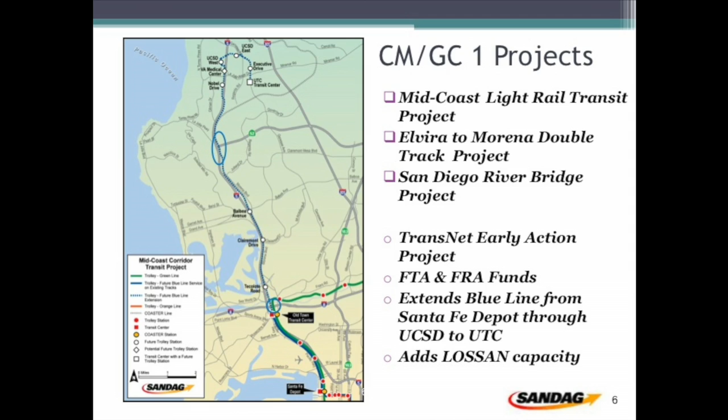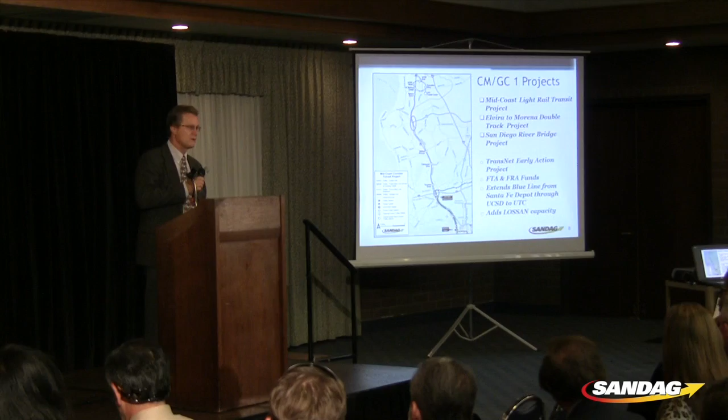The real improvement here is that it will be a one-seat ride on the Mid-Coast project from the border all the way up to the UTC area, including the University of California San Diego. You've also got a stop at Old Town, which connects that to UCSD, and a stop in the Linda Vista area, which connects us to USD. And the LOSSAN double tracking will be one element of significantly increasing the capacity for the COASTER rail up and down the coast from Oceanside down to downtown San Diego.

So the next slide just is some facts and figures about the Mid-Coast project. It's about 10.9 miles of actual rail construction from Old Town north. We're going to do a flyover so you'll see where that's going exactly. We've got about 4 miles of elevated guideway. So once we get up in the UTC area, it's all aerial structure. There's 4 at-grade stations and 5 aerial stations.

It's a major rail project for light rail, so that includes electrification, which is traction power, rail signaling, communications, telephones, PA speakers, visual message signs. Just kind of listing off some of the things that small businesses have opportunity to work on in both the design and the construction side.

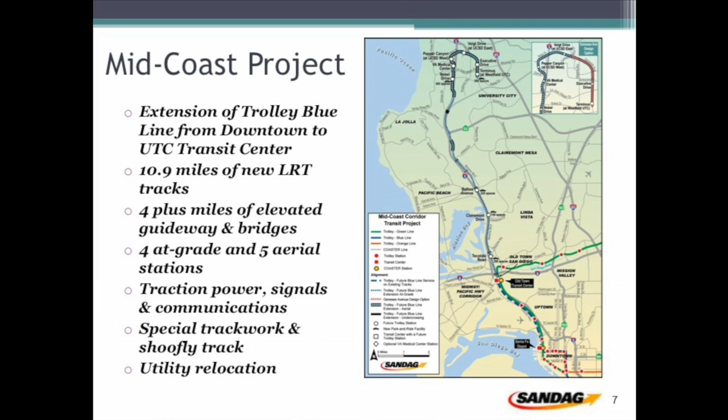Then we have a lot of track work, including a lot of temporary track work. And track work requires things like grading, rail supply, ballast supply, a lot of trucking that's involved in that. And then we've got utility relocation, and a significant amount of utility relocation in the project. So also some significant opportunities for small and disadvantaged businesses.

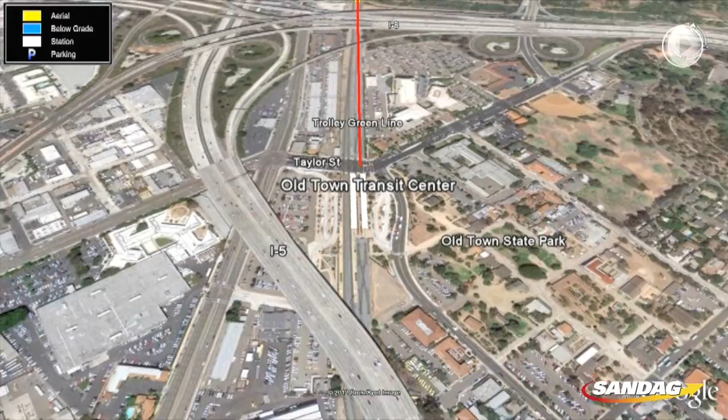So what we're going to do next is go through a flyover. We're starting at the Old Town Transit Center, and we're going to be going north, more or less parallel to I-5. So here we go, heading underneath I-8. Pause it for just a second. So this is where we've got bridges over the San Diego River. So the yellow is the new light rail bridge.

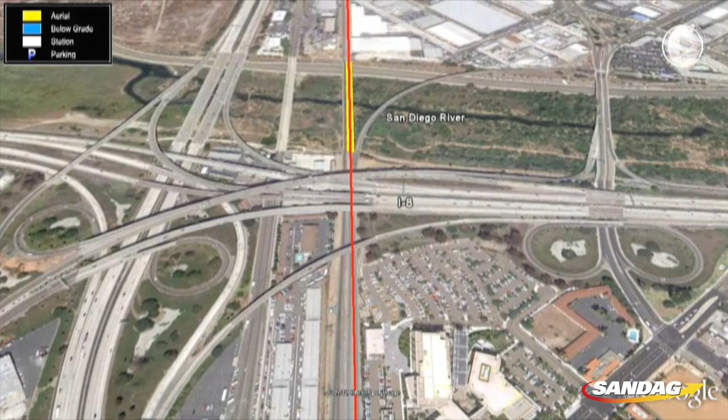Just to the west of that, we're going to first build a new bridge for the LOSSAN, tear down the old bridge and replace that so they get 2 new double track bridges, and then we're going to build a light rail bridge. So we've got essentially 3 bridges in this area that are going to be part of the program. Go ahead. So now we're building track at grade parallel to the LOSSAN track, and pause here.

We have a station at Tecolote. It obviously includes parking. Typical at-grade stations on this project are mostly going to have parking. So we've got parking, so that's paving, striping, lighting, all those things. So go ahead, moving on. A little bridge over Tecolote Creek.

Continuing to move north, again, we're paralleling I-5. And this is basic track work construction. And then pause it here. So we're at a station at Clairemont Drive, and that also will have parking on the east side of Morena Boulevard. And so we can keep going.

And so again, we're building track, and as we're starting to head north, we're getting into other areas where we do a lot more retaining walls. So there's going to be retaining walls and grading in this area going north.

We have a station at Balboa Avenue. The station at Balboa Avenue includes some work with traffic signals and street reconstruction at Balboa Avenue Station, 220 parking spaces, a bus transit center. So all of the things that go with that: lights, paving, grading, rail construction. Go ahead.

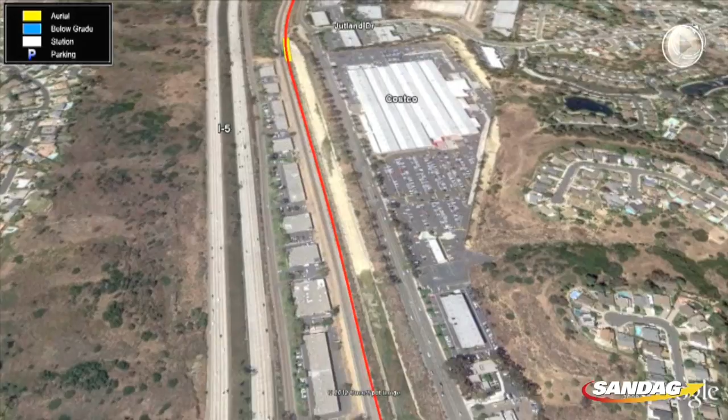And so we're continuing to move north. And just, again, we're in the existing railroad corridor. The yellow is where we're going to cross Rose Creek once, and we're going to cross Rose Creek again, going north. And so this is just construction, and go a little farther, and just pause it here.

Now this is one of the more interesting and I think more challenging parts of the project. In this corridor where we've been going so far on this little flyover, we're in an operating railroad. So in this area, the Coaster has trains that run in the commuter hours, BNSF runs in the midday and at night, and Amtrak runs in the same corridor. So a lot of the challenges here aren't so much engineering challenges, they're construction phasing and coordination challenges.

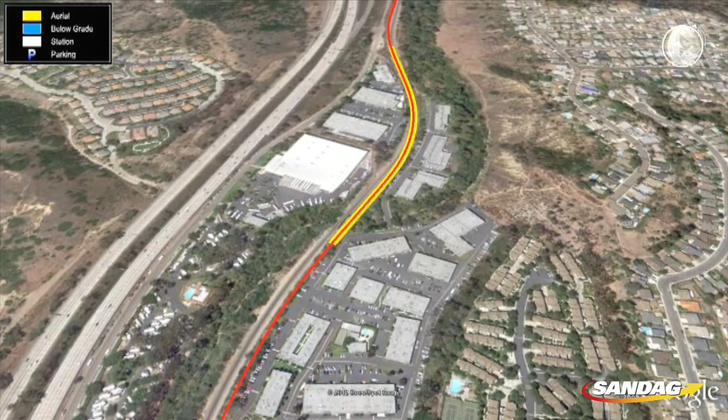And in this location, that yellow indicates where, up until this point, as you saw, we've been on the east side of the LOSSAN tracks, the way we cross. We've got to continue up I-5 and go north. At this point, a little farther to the north, the LOSSAN tracks go east. And so we're crossing over. So this is a major structure where we're crossing from the east side to the west side of the tracks and landing just back underneath SR 52. So go ahead.

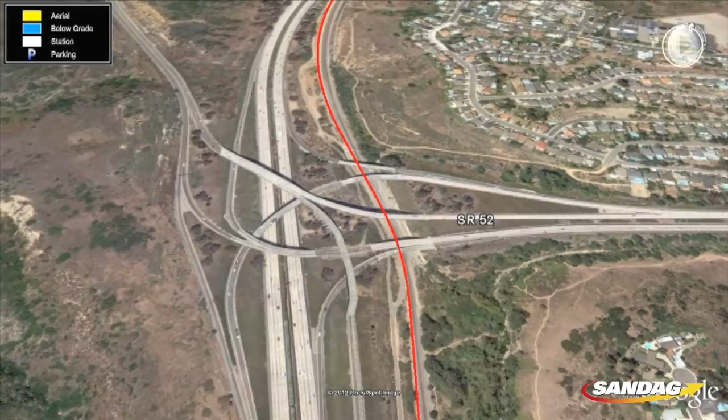And so in this area, we've got some work. Pause just real quickly. There's a significant drainage channel that's being reconstructed under SR 52. Keep going. And so now we're paralleling the LOSSAN track, but now we're on the west side. We continue to go up, and pause real quickly here. This is where we separate. They're going to start making a curve to the east. We're going to keep going to the north.

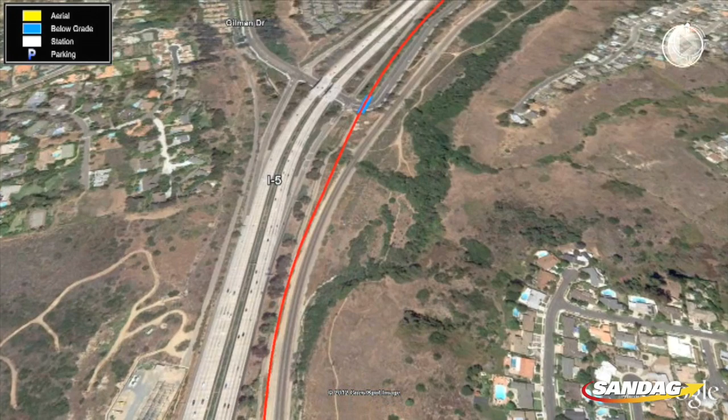It's not really a tunnel, but we're going to have a cut and cover section for the light rail to go underneath. That's Gilman Drive, La Jolla Colony, the elbow in there. It goes from one street to the other. And so we're going to build a cut section for the trolley and put the roadway on a bridge above the trolley. So keep going.

And so now we're going north along I-5. This is a significant amount of embankment and retaining walls. We are in Caltrans right-of-way, so pause for a minute. We've got to work with Caltrans, right of entry permits, all of the issues that go along with working in Caltrans right-of-way, if any of you have done that before.

This is a bridge, and from this point on, we're essentially going to be on aerial structure. So you're looking at a project that's going to require a tremendous amount of deep foundation drilling. We've got geotechnical work. We've got utility work to clear for that. Drainage. There's just a tremendous amount of work that goes along with this overhead construction. So go ahead. So we're going to cross I-5 for the first time.

Have an aerial station at Nobel Drive. So at Nobel Drive, we're going to have an aerial station. At this point, we also need parking for this station. And in order to get that parking, we're going to build a parking structure. We have to replace the parking that's existing there for the Nobel Drive Shopping Center, or it's actually the La Jolla Village Square Shopping Center at our Nobel Drive station.

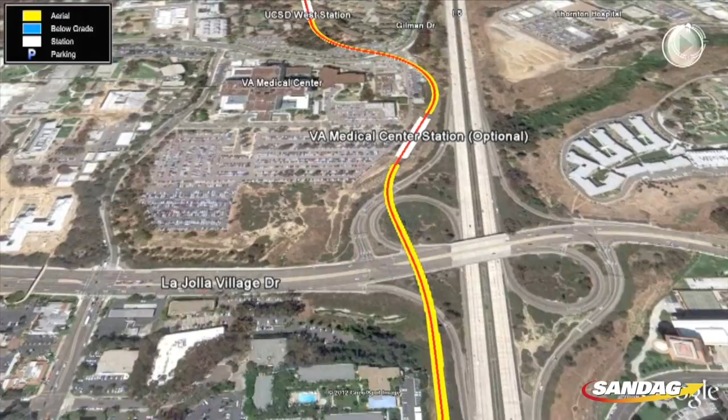So moving on, again, aerial structure, cross La Jolla Village, VA Medical Center. We got a station that the board just approved there. And pause here real quickly. Then we go on to UCSD campus. A lot of the challenges I said were construction phasing. A lot of the challenges are also institutional. We're working a lot in the city of San Diego property. We're working a lot on Caltrans property. But we're going to go on a university.

I was involved when we built the SDSU portion of the Mission Valley East project. Universities are unique. They have a lot of requirements. We're probably going to have to do a lot of outreach to the students. We're going to have to probably find a way to bring some of the students on board for the construction. That helps. They flag construction equipment in and out of the campus. But they have very unique requirements, and we're going to have to work with them to make that happen. Go ahead. So that's one station on the university.

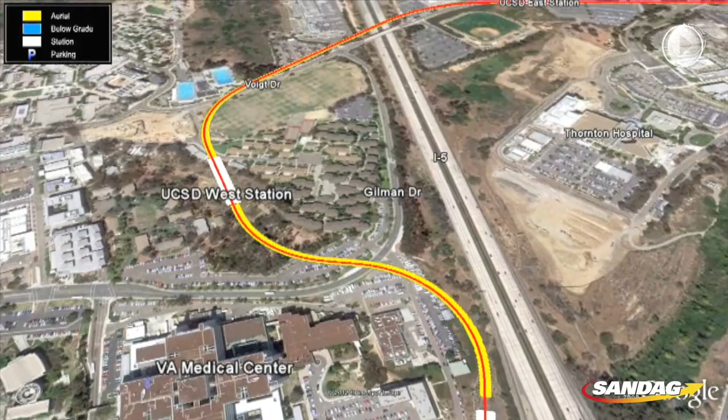We follow Voigt Drive, cross the freeway a second time, station at UCSD East, and then pause here. Up to this point, we've kind of been out building aerial structure in an area with nothing really around us. We're going to transition into the center of Genesee Avenue. It's a 6-lane boulevard. And we're going to build the trolley in the center of that 6-lane boulevard on an aerial structure. So as you can imagine, this goes into things like traffic handling. A lot of traffic handling is going to be required. I think there's a huge opportunity for subcontracting in this area.

So go ahead. So we're building an elevated station in there. We have a station at Executive Drive, elevated station. Elevator, stairways, all those things need to be there. Emergency exit requirements. And then UTC, this is the final station. And the yellow at the end is the tail track. We're going to actually extend the trolley beyond the end of the track. So that's the flyover of the project.

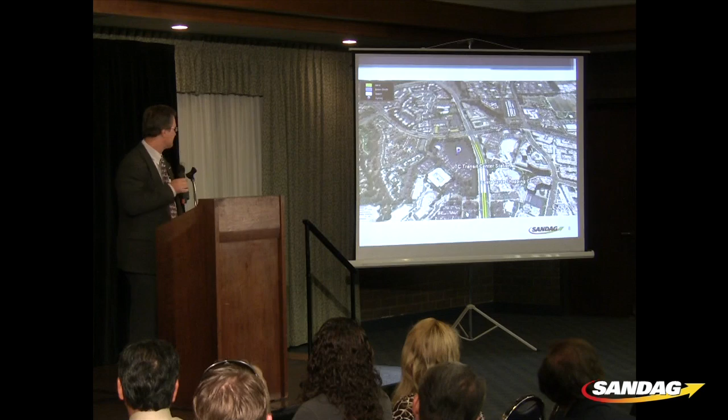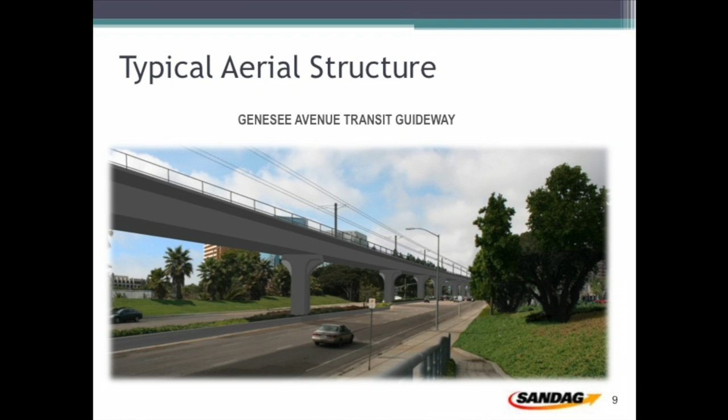And this is a slide that shows you what that aerial structure is going to look like. So we've got deep CIDH, or drilled footings for the columns, large concrete columns, concrete structure. Right now it's intended to be cast in place, but the design will look at that further. You see the wire above, so we've got wire, there's railing, there's a lot of things.

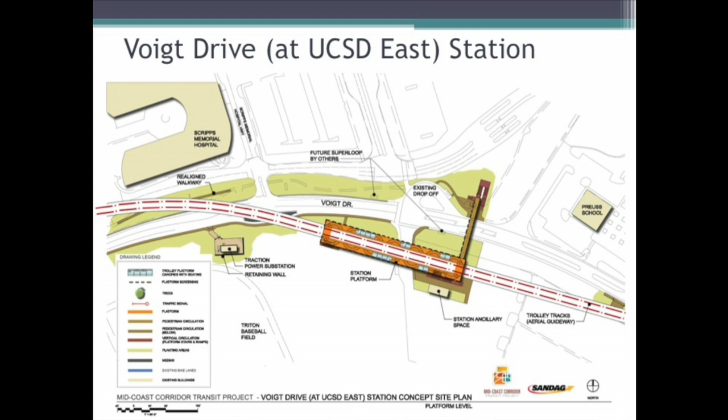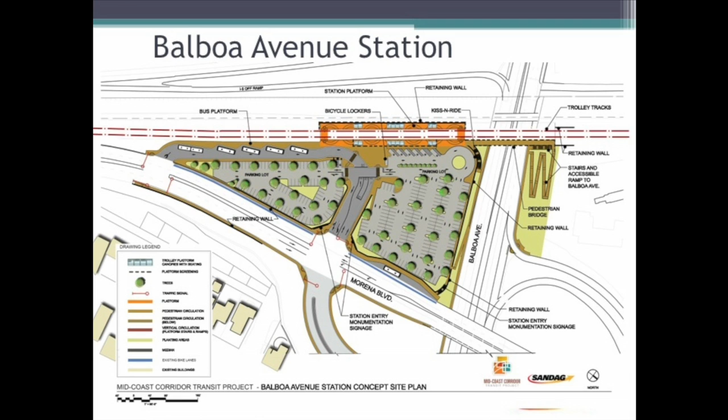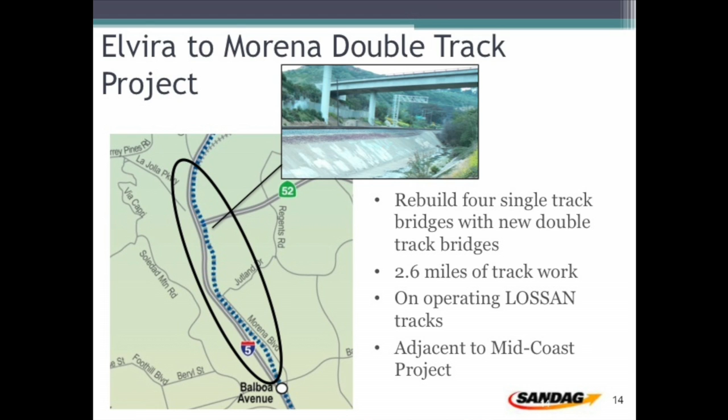Okay. All right, going on, we're doing the 3 projects that I've just gone through through a construction manager, general contractor, CMGC contract. This is a new method to SANDAG. We've pretty much always in the past been design, bid, build. So we would produce 100% design plans, put them out for low bid, take the low bid, and build the project with all the things that come along with a low bid project.

We have 2 design build projects that SANDAG's currently doing. We got the state to pass a bill that allowed us to move forward with CMGC. So that's what we're going to do. So again, it's a new method to SANDAG. What we were really looking for out of this is a creative process where, with the CMGC, we're going to actually hire the contractor before we finish design as part of the design team. So the contractor will be put on the design team under a separate contract, and then once we've completed the design, we will ask them for a GMP, or guaranteed maximum price.

And so we anticipate at least 3 contracts, 1 for each of the projects I've shown, but there could potentially be more guaranteed maximum price contracts out of this procurement. So we have 1 procurement, 3 major components to it. The advantage we see is we believe it's going to do a lot to help us improve our design and our production. We're going to work directly with the people building it as we put together our plans and specifications.

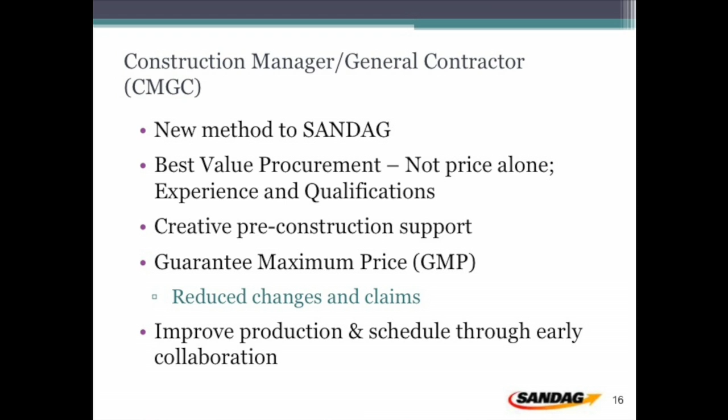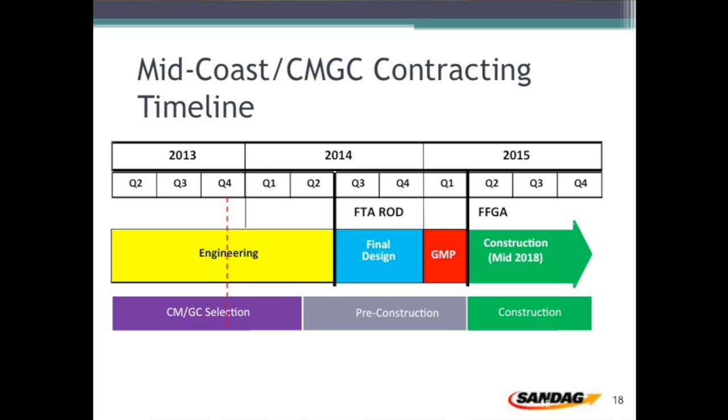In blue, it says final design. That's an FTA requirement. We have to cross a threshold and get them to give us permission. Then we'll negotiate a guaranteed maximum price with the CMGC during pre-construction services, and then go immediately to construction. The way it's going to work in front of our board, we've gone to the board and we've got evaluation criteria and selection criteria for that CMGC. That was approved by the board.